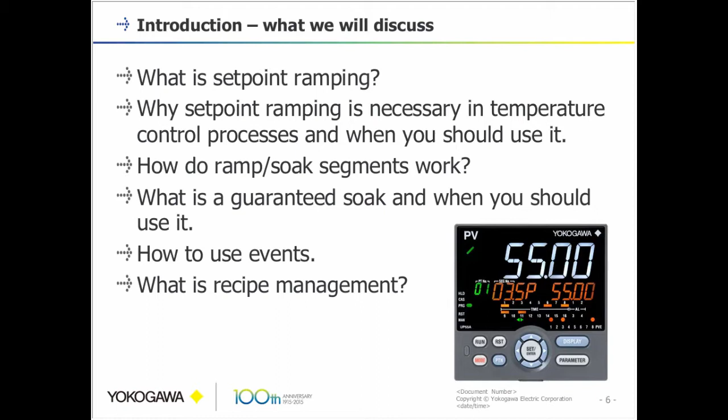First of all, we're going to talk a little bit here about set point ramping. Basically, the definition of set point ramping is increasing or decreasing the effective set point towards the final target set point at a predefined rate. A normal set point change, where the current set point is changed immediately to the new desired set point, is not always desirable. For many applications, a gradual increase or decrease to the new set point has its advantages.

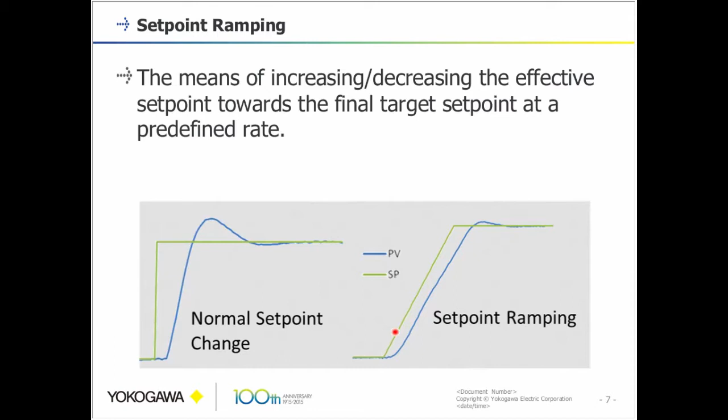When should we use set point ramping? To prevent or greatly reduce set point overshoot, to prevent thermal shock to the product and furnace or oven, to eliminate the need for manual startup, and also to prolong the life of hardware components.

Set point ramping calculates numerous sub-set points that the process will reach before finally attaining the target set point of a particular segment. In doing so, the difference between the set point and the actual temperature is greatly reduced. As the controller moves from one sub-set point to the next, a smaller change in output is needed than in the normal set point change. This in turn will prevent or greatly reduce set point overshoot.

Thermal shock occurs when there's a rapid, uneven temperature change to parts or product or even the furnace components, including the refractory. When set point ramping is used, drastic temperature change can be eliminated to prevent thermal shock from occurring.

In some applications, it may have been necessary to start the controller up in a manual type mode and have operators adjust the output manually until a desired condition is obtained. This could be eliminated with set point ramping.

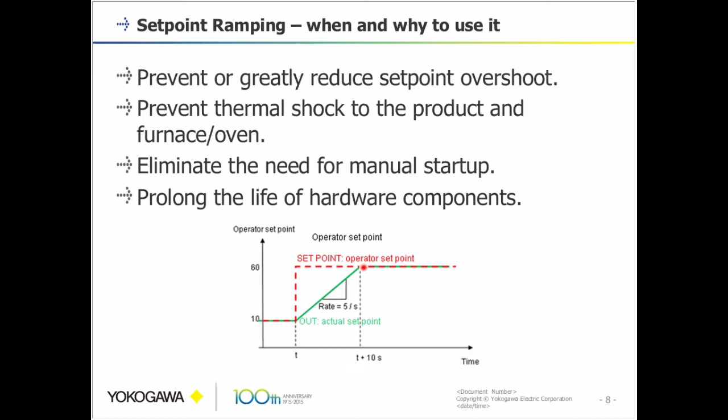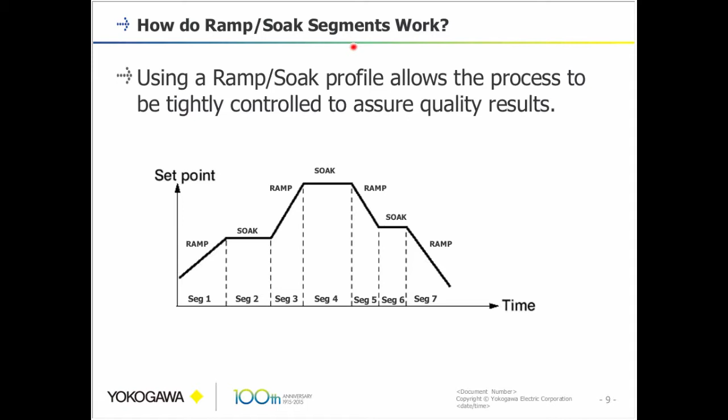Before defining the individual segments in a pattern, it's necessary to define the time units, usually hours and minutes or minutes and seconds. It's also necessary to decide what segment time setting method you would like to use. Typically, there are two choices: ramp rate, for example, 30 degrees F per minute, or simply time.

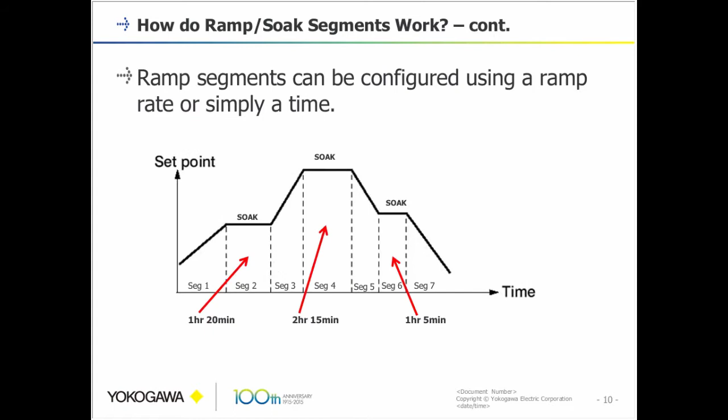And here we have an example of the ramp rate, where we're actually specifying so many degrees per minute in each of the ramp segments that you see here. Soak or dwell segments just require a time setting.

Heat treatment temperature mainly refers to a soaking temperature and time. The soak temperature and time significantly affect the material properties of parts. So soak segments will instruct the controller to maintain the set point of a particular segment for a certain amount of time. An example would be the soak segment set point was 500 degrees Fahrenheit, and we would maintain that for 6 hours. And in the graphic here, we have multiple soak segments at different lengths of time.

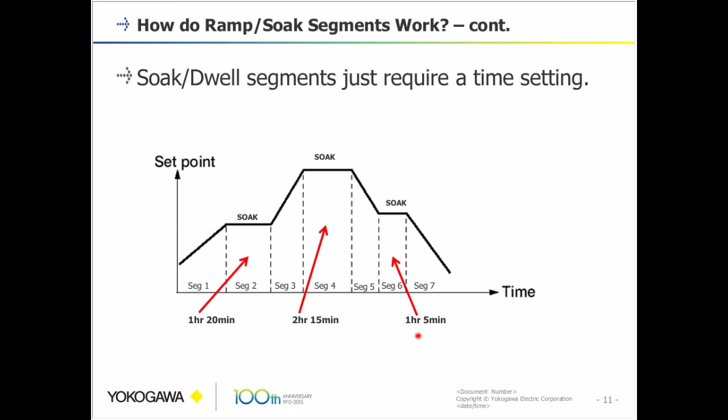Another aspect of recipe management is the guaranteed ramp and soak features. Guaranteed ramp is simply a way of making sure that the desired ramp rate is maintained during a ramp segment. During a ramp segment, there are many things that could affect the ramp rate of the process. Events such as change in process dynamics that would affect the effectiveness of the loop tuning.

As the temperature changes, the process responds differently to the PID values. Steam pressure or chilled water could affect the ramp rate as well, if they're using that in a particular process. Other events such as user interaction with the process, like opening a door, could affect the ramp rate.

In a guaranteed ramp, a temperature band is placed around the ramping set point, and as long as the process variable remains within this band, the process continues. If the process variable exits the band, then the controller set point ramp is placed into hold and waits for the process variable to recover before continuing.

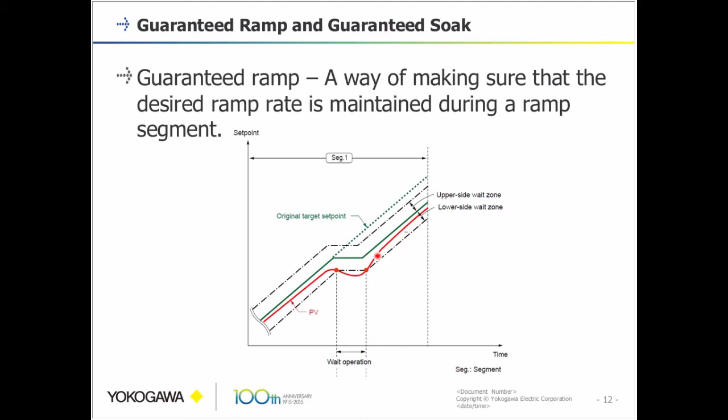For the guaranteed soak, that's what we're going to be using in a soak segment, hence the name. It's a way of making sure that the process stays within the desired temperature band for this particular soak segment. Normally in a soak segment, the controller will try to maintain this set point for this length of time.

Much like the guaranteed ramp, it is possible to set a band around the set point and have the controller pause the segment timer if the temperature goes outside of the band. Once the temperature recovers, the segment timer continues. This is extremely useful when, for example, a group of parts need to be held at 500 degrees for a total of 2 hours.

So again, here we have a target set point here in green. We have our process variable, and this is just one segment here. So we're approaching the temperature. Something happens in the process where our temperature takes a dip and actually drops below the lower side of the guaranteed soak. And this is where the wait operation begins.

The timer is paused, and the controller tries to allow the temperature to come back up. Once it reaches back into this band around the set point, the timer is started again, and the controller will try to get back up to temperature and finish that particular segment.

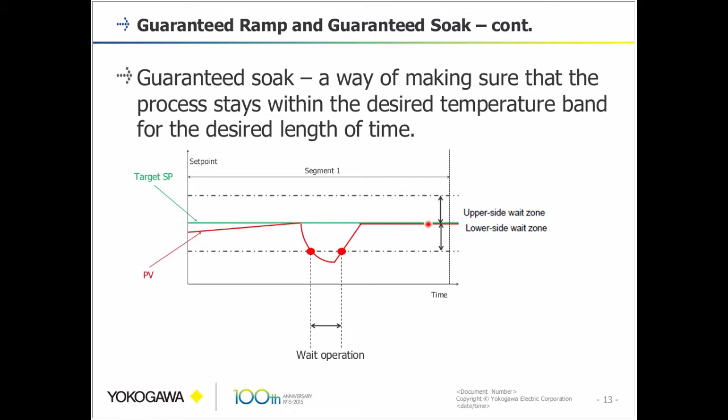Going along with the ramp and soak segments in the controller, we also have the capability of using events in most controllers. There are two types of events that are generally available in most modern ramp soak controllers. Those are process-based, or what we call process variable events, and also time events. And these events can be triggered in particular segments.

For example, here we have process variable event number 1 with different types and different set points going across the whole program. For the time events, we have time event 1 and time event 2 going off and on during different points of the segment. Basically, you can think of process-based events as an alarm that are active while the profile is running. Types of process-based events or process variable events include high, low, deviation, velocity, etc.

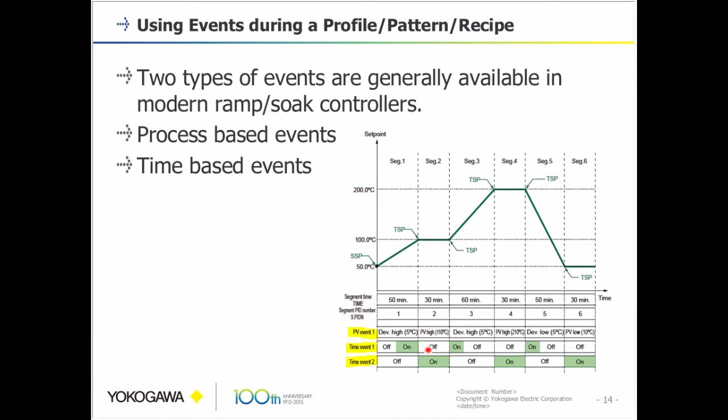Process events are usually set for each individual segment where they're needed. They're typically used to trigger a light, horn, buzzer, or alarm to alert the operator of a particular process condition. Process events could also be used for interlocks on our furnace door. In this example, a high alarm set point could be used to close a contact to prevent the door from being opened above 75 degrees.

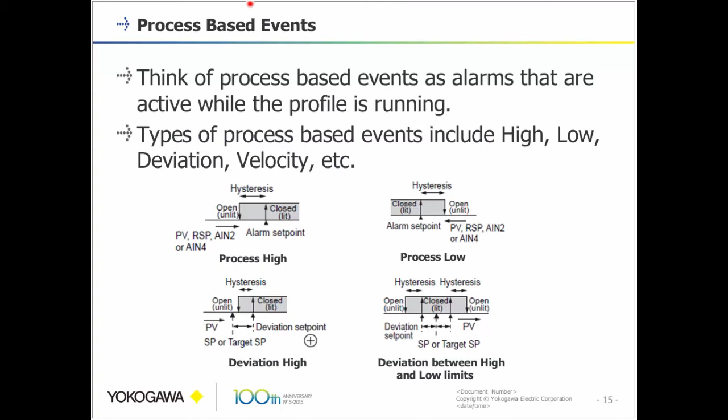So say the furnace gets up to temperature and it's running, and you don't want the operator to inadvertently open the door and possibly burn himself. That's a really common application for a process variable event. Time-based events make use of the segment clock timer to open and close contacts at predetermined times. And time events are usually set for each individual segment, just like the process variable events. They're set where they're needed.

They can be used to signal other equipment that a program is running, that the program has ended, that the program is currently in segment 3, etc. They can also be used to turn on fans, an extra heater, or open a vent, for example. And in the graphic you have here, we have the 3-segment program. We've got the process variable going up. The time events work independently of the process variable. They're just mainly concentrated on the time or timer that the controller is using for each segment.

This time event number 1, it's going to be off for the first portion of the program. It'll come on, stay on for a few minutes, and then before the end of this segment, the time event actually goes back off. Segment 2, the time event is off for most of the segment. Right before the segment is over, it goes on for a brief amount of time and then shuts off before we move into segment number 3. And that's just an example of how the time events work. We have multiple events coming on and going off at different points during this particular program. Very useful.

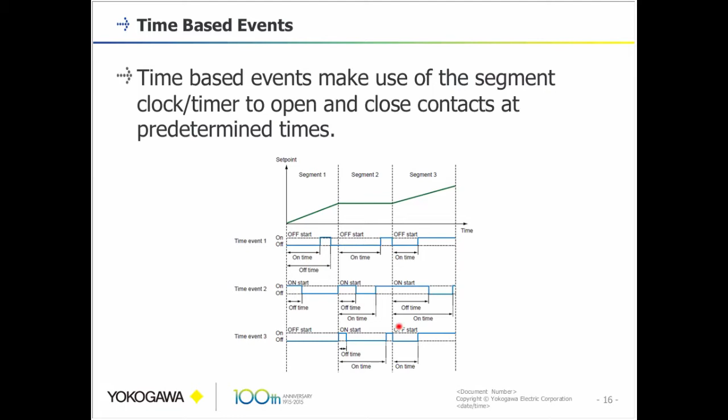Recipe management can be defined in several different ways. In our discussion here, we're going to define it as a way to organize, program, modify, start, stop, and select different profiles on a controller. Most controllers are capable of multiple patterns and perform their own version of recipe management. The controller stores all of the patterns in its internal memory. It is possible to select and run patterns from the controller as well as program and modify them.

Along with that, controller manufacturers usually offer recipe management software to make it possible to do these same functions with the use of a PC. Patterns can be uploaded, downloaded, as well as comparing patterns that are on the PC with the ones currently in the controller. This is really useful, especially if you have some people that are going out and making changes to the controller that they're unauthorized to make. You can actually hook up to a controller and with the use of the PC, compare the known good file with what's in the controller, and it will show you the values that are different and allow you to recover and change the program.

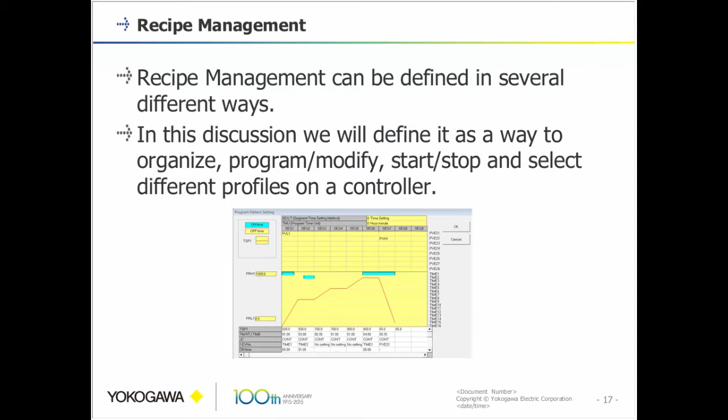SpecView will allow you to create and edit profiles as well as configure and edit the controller. As you can see here, we have a couple sample slides of a project that was built using SpecView. Down here, we can actually construct the program pattern. We've got the different segments here: target, set point, time, digital outputs going off and on. We can also enter batch numbers, current recipe names.

We actually have an icon of the controller here that is functional while the program is running. The status screen would show you your batch ID, maybe an operator name, start time, end time. You can actually launch the pattern from this screen as well.

In addition to the recipe management here, we also have the capability of trending. With most recipe management software, you can do trends of your process. We even have little bubbles that pop up when our events are happening. We have a soak start bubble here and a soak end bubble here.

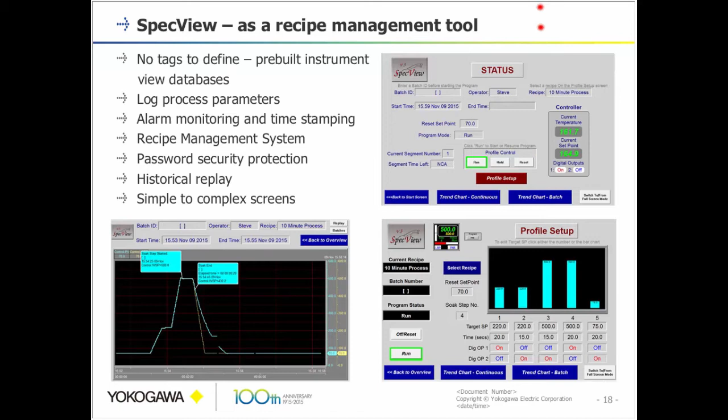Yokogawa's ramp soak controller line is made up of the UP55A and the UP35A. The UP55A is capable of storing up to 99 patterns in its internal memory. The UP35A can hold up to 4 patterns. Yokogawa offers a configuration tool recipe management software package called the LL50A, which enables you to connect to the controller and do the housekeeping, programming, pattern creation, and monitoring using that software.

Also, by using communication options on these controllers and one of the third-party packages, such as SpecView, it is possible to increase the number of patterns available to them as well as customize the look and feel of the data management. And by using the recipe management software, you're not restrained by having to push the buttons on the front of any manufacturer's controller to edit or change or to monitor what's going on with the controller.

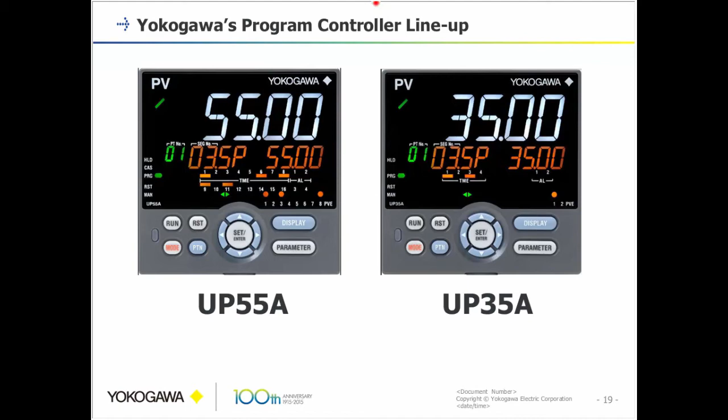Okay. I'm going to have... Okay, let's do the questions before we do this. All right, quick change of plans here. Sorry, everybody. Thanks, everybody. We're going to do the questions first. We had a couple of questions that came in, and we want to go over those first and have Rob answer the questions before we get to the free book drawing here. So,

Okay, so one of the questions that came in was they want to take a time event, and they want the time event to stay on at the end of a pattern. So when the pattern ends, so does the event. So the pattern ends, the event ends as well, time event. How do you do this? How do you keep the event on when the pattern's finished?

It would have to be a process variable event to keep the event on. In most circumstances, you would have to use what we call PV tracking. We would go to a local mode and have a local set point entered into the controller. That way, the events would be active in the program pattern, but also be active after the program was over and when we were using just a single set point control strategy.

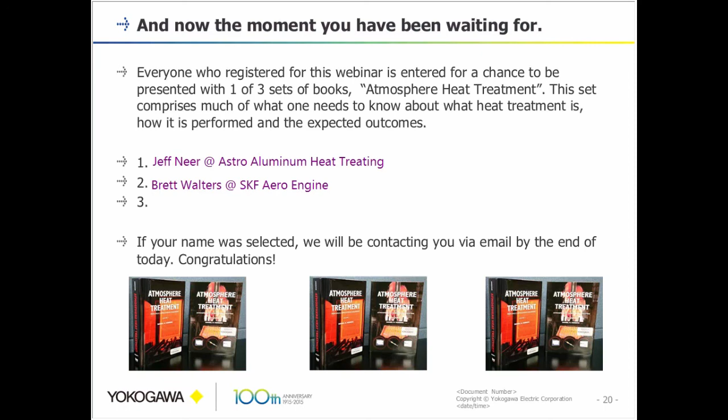So, anything else, Rob? I think we've already done the questions. Yep.